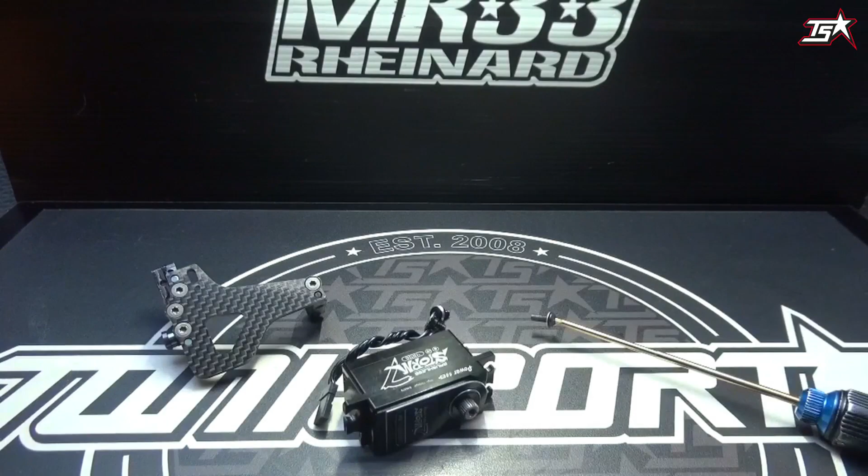Okay, let's start with the servo installation. First of all, I want to point out that these advices and tips are the same for almost every low-profile servo on the market, so it doesn't matter which servo you want to install in your touring car. Just take care and make it as precise as possible.

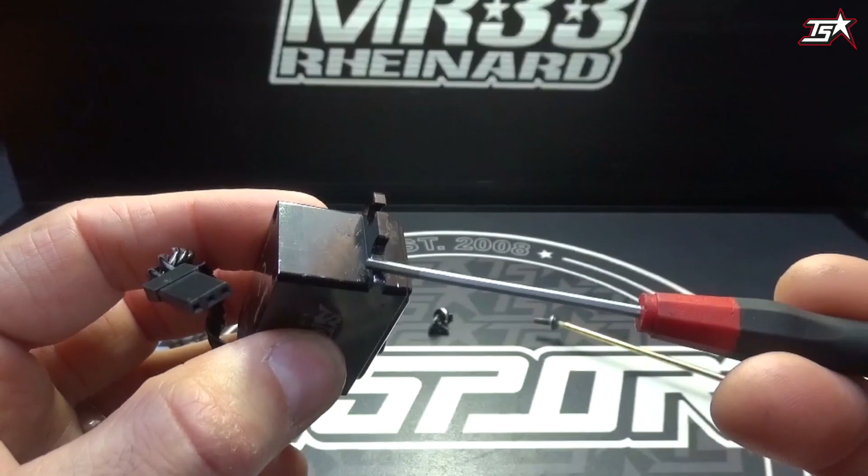First of all, I want to show you that I dremeled away this section here on the servo, the fourth mounting hole, because in this area the belt of my touring car is passing the servo, and in a lot of touring cars it's the same nowadays. You have to cut that left lower mounting hole. It doesn't matter if it's a plastic or an aluminum case on your servo. If you have to cut it, just make sure you cut it properly and allow your belt enough space to pass the servo without scratching or rubbing on the servo or the servo mount.

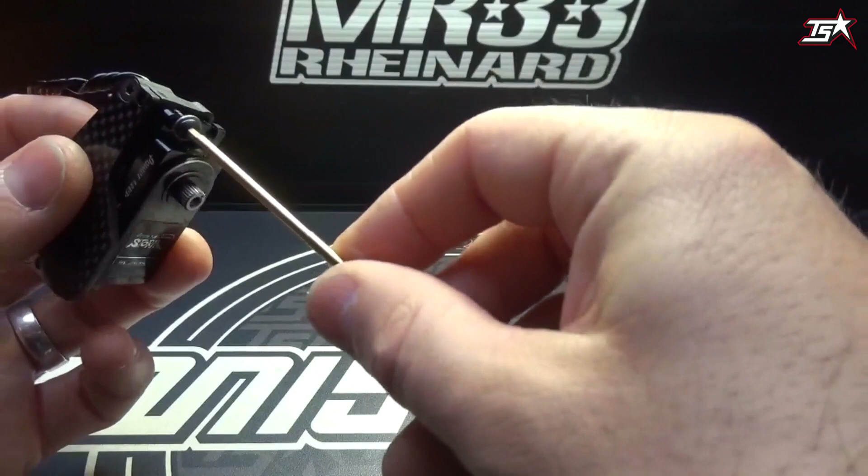The next step is to mount the servo in a proper way to your servo mount. These servo mounts are pretty much equal to this one here, and we now have the option to use 3 holes for the mounting. Normally you can use a standard button head screw and a washer to mount your servo, and if you do it like this, you can mount it properly. But I hope you can see it now.

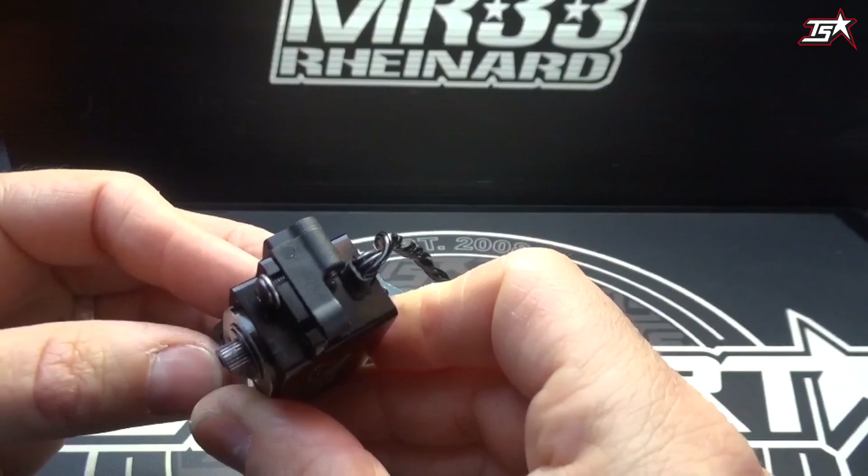When you only use a screw and a washer, it might happen that during a crash your servo can still shift, because the servo mounting holes have a bigger diameter than the screw shaft. This happens from time to time, and it's possible that your car will not drive perfectly straight anymore after you hit a barrier. So if you want to prevent this, you can use better servo mounting screws. They are available from different manufacturers on the market.

For example, I can show you these one-piece servo mounting screws here from One Up Racing, made from aluminum. But screws like that are available from other manufacturers as well. The benefit is that you have an all-in-one solution: the screw, the washer, and this piece of aluminum, which will fit exactly into your servo like this, without allowing the servo to move after you have mounted it on your servo mount in the car. So this is what I recommend to use.

Spend some extra bucks for good servo mounting screws, because after you have mounted your servo to your servo mount, you can be 100% sure that your servo is absolutely straight and mounted symmetrically onto your servo mount. You have to take care that the gap between the servo and the servo mounting plate, left and right, is the same, so you can be sure your servo is straight in the car and not in the wrong mounting position, because that will give you a worse steering feel and your car will not drive straight.

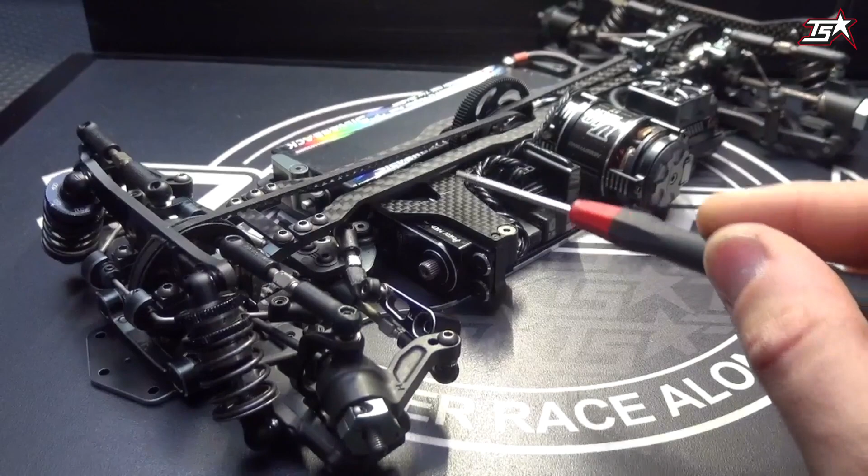Okay guys, the servo is mounted into the car in a correct position, because we used these high quality servo mounting screws. And now it's time to get your servo horn mounted here onto the servo.

Always make sure that you use the correct length of the steering link and this steering connection link according to the manual of your manufacturer when you build a car for the first time, or especially when you want to rebuild it and set everything to zero. It is super important that the left and right steering linkage are the same length. This can maybe have a difference of 0.1, 0.2 or 0.3 millimeters, which is not super critical, but a bigger difference in the steering link left and right will make your car not feel the same in left or right turn corners.

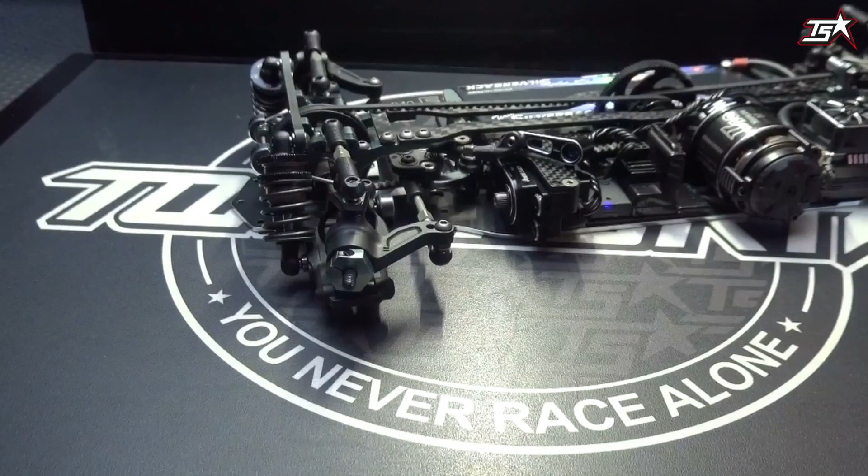Now you have to make sure that your steering servo is in the zero neutral position trimming wise, so you have to switch on the car once, then use your transmitter and set the steering trim to the zero position, which I will demonstrate now for you. Now we are in the zero position, which means your servo here is absolutely centered.

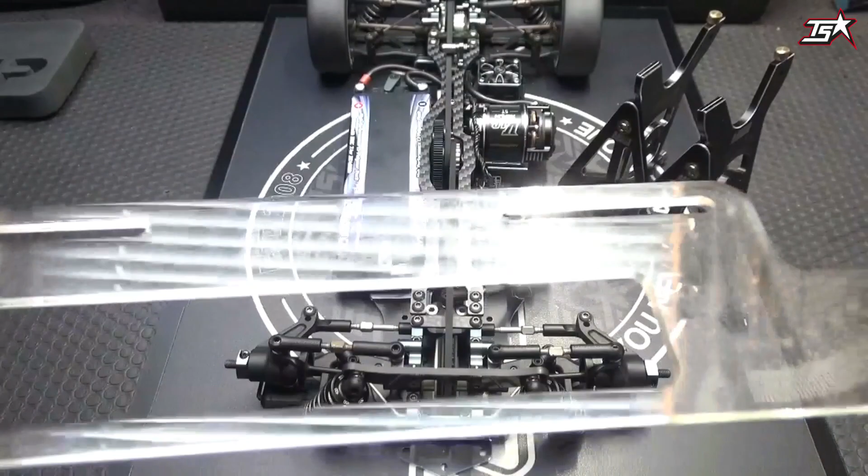Okay, now we are getting closer to the final steps of the steering adjustment, where we will need the setup system and the plexiglass plate to adjust our steering angle and the toe out.

But before we do that, I want to give you one more piece of information concerning the servo arm and the steering link. As I told you before, I recommend that you build these parts, the steering link and linkage, according to the manual, because then you will have a straight steering setup. The reason is that almost all manufacturers construct their cars to achieve a 90 degree angle between the servo horn and the steering link.

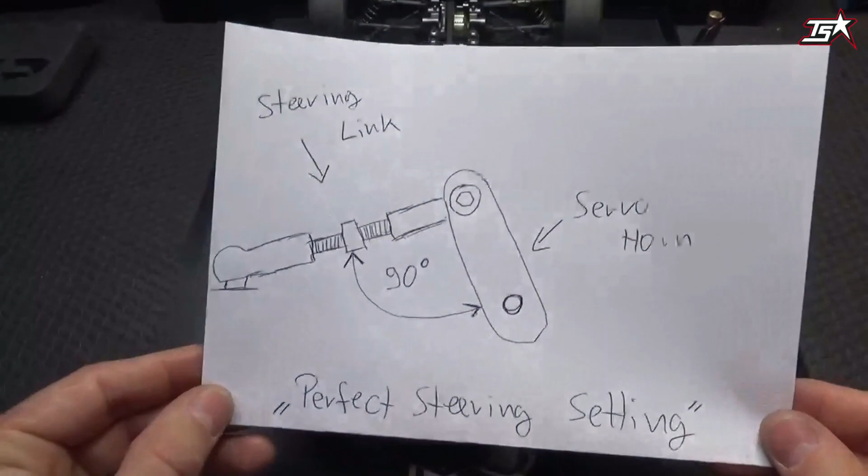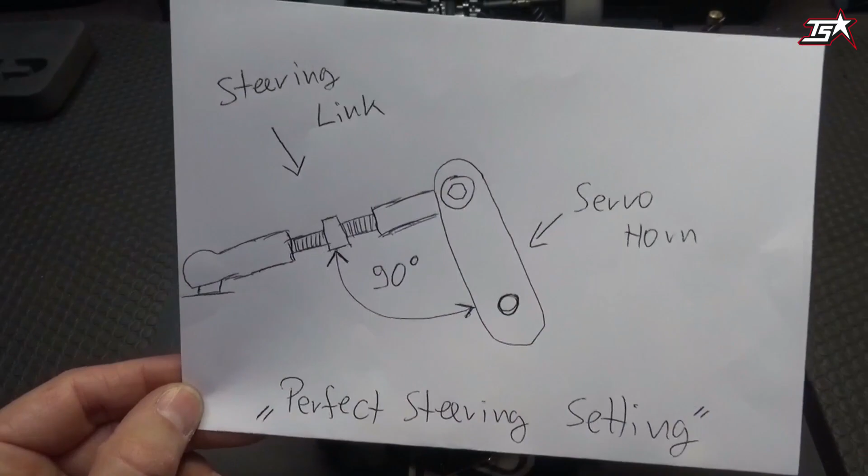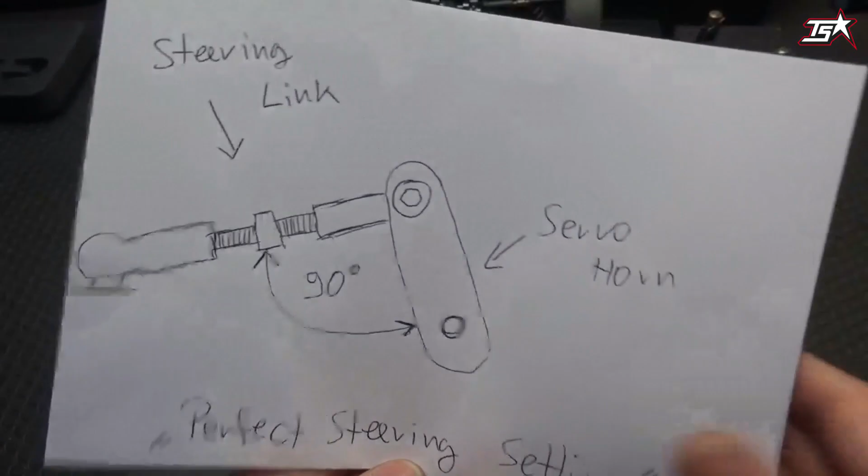For better understanding, I made this small drawing here. It is good to have a 90 degree angle between the servo horn and the steering link, because when we have this, the steering will feel the same left to right. We start the steering mechanically from a zero position, where neither side is more angled than the other when you steer left or right. So this is why all manufacturers have some different measurements in the linkage lengths, but in the end the result should be the same for all of these: to get this magical 90 degree angle between servo horn and steering link.

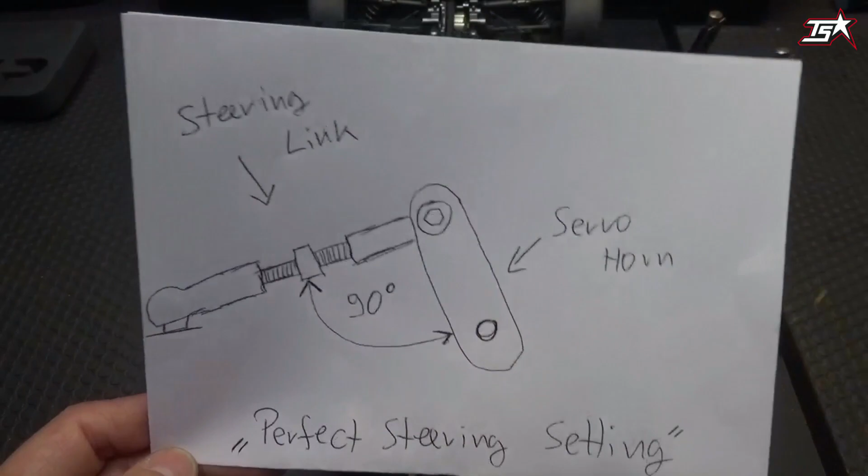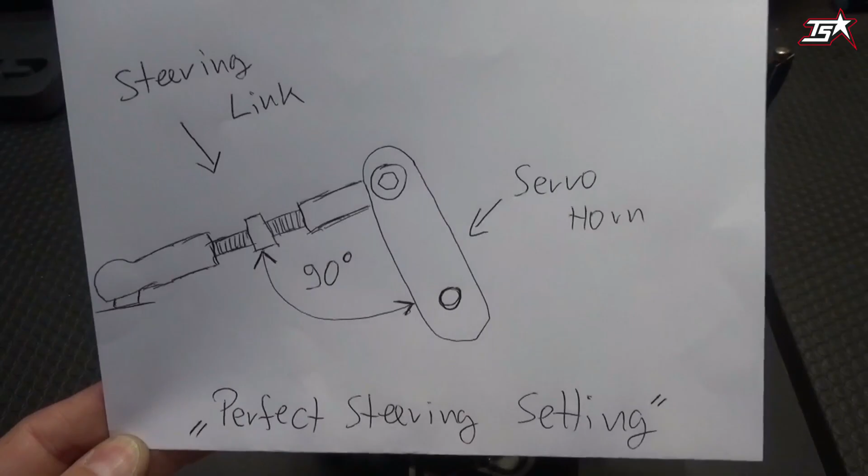If you cannot achieve that in a perfect way, maybe if you only land at 89 or 91 degrees, you will not feel that. But when there is a huge difference in the angle, you will have a car which drives left and right completely different, and this is what we don't like to have on the track. For fast lap times, you have to create a car which is absolutely amazing to drive and which always feels good in the corners, not good on the left side and bad on the right. So that's the reason why.

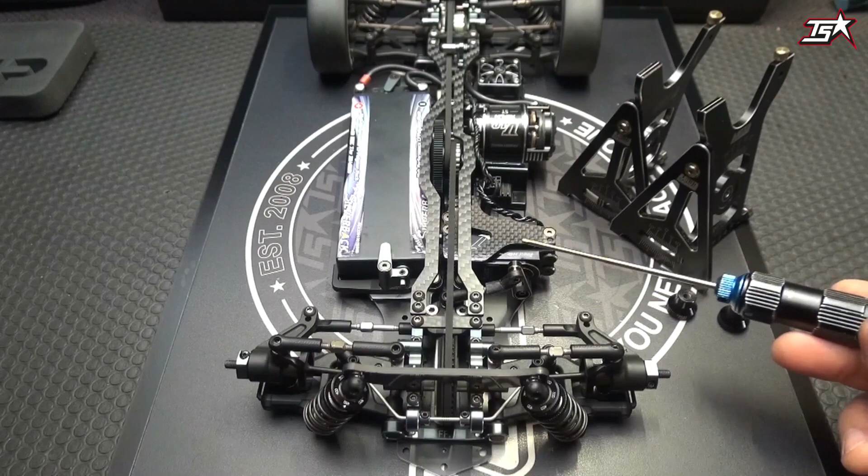When you install your servo horn onto the servo with your trim in the zero position, it can sometimes happen, depending on different servos on the market and their different gears and internals, that not every servo has exactly the same zero position. Sometimes when you install the servo horn, your steering in total will not be straight and may be a little off to one side or the other. In this case, when you are sure that your links are equal and everything else is good, you can use the sub-trim function of your radio to adjust a new zero trim point. With this sub-trim you can easily set a new defined neutral position of your servo, and then you can start adjusting everything perfectly left and right.

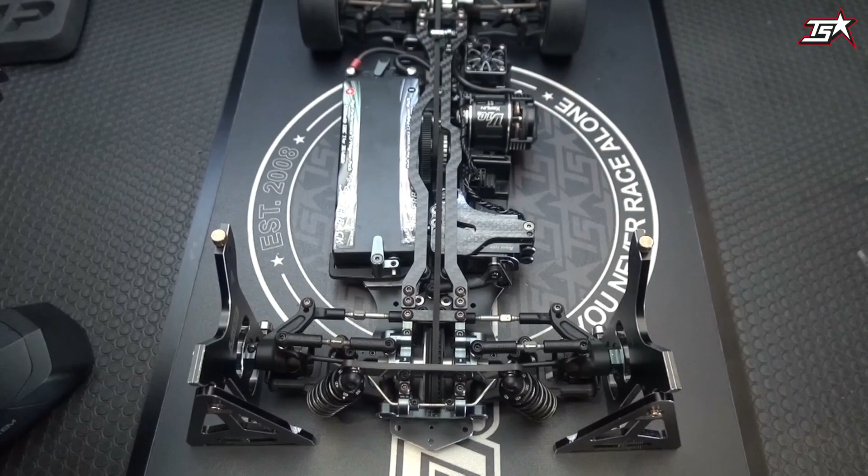Okay, now we are ready to adjust the final things on the car, and in these steps it is important to set the correct toe out first. So you need your measurement plate for your setup system, and then you have to switch on the car. I will not do it now to prevent the loud cooling fan from running.

With your car switched on, which means that your servo will hold the neutral position, you can adjust the left and right side of your toe. Generally it is important to say that on a touring car, or almost every RC racing car, we never run toe in on the front, because this will make the car almost impossible to drive straight.

Also, a toe of 0 is normally not used. We mostly use toe out, which means the wheels point a little outward in the direction of driving. Normally we use 1 degree toe out per side, maybe 1.5 or 2 degrees per side when racing on a super high bite track and you want to smoothen out your car a little and take away the aggressiveness. So that's important to know, I think.

Once you have adjusted your toe out left and right to the same value with this little tool, once again check the measurements, the lengths of your steering links left and right, that they are almost the same or very close to each other. Today's cars are all produced and machined in such a precise way that you normally cannot get big differences in these steering linkage lengths, because if you find out you have to use completely different measurements, then something else must be wrong.

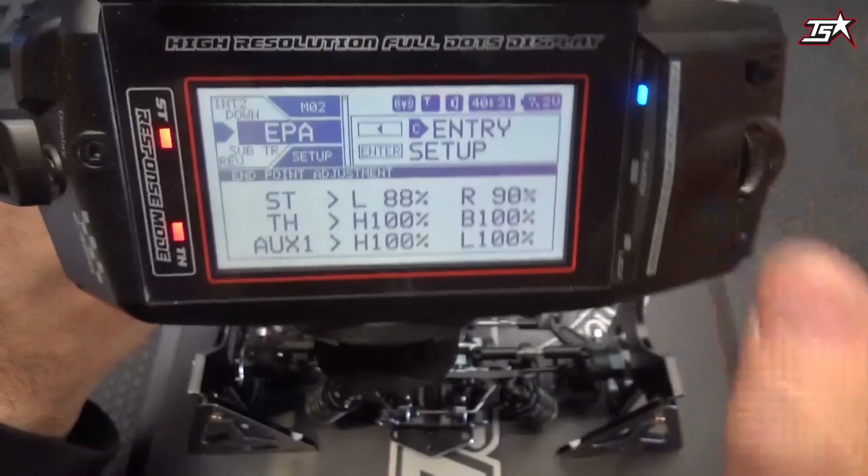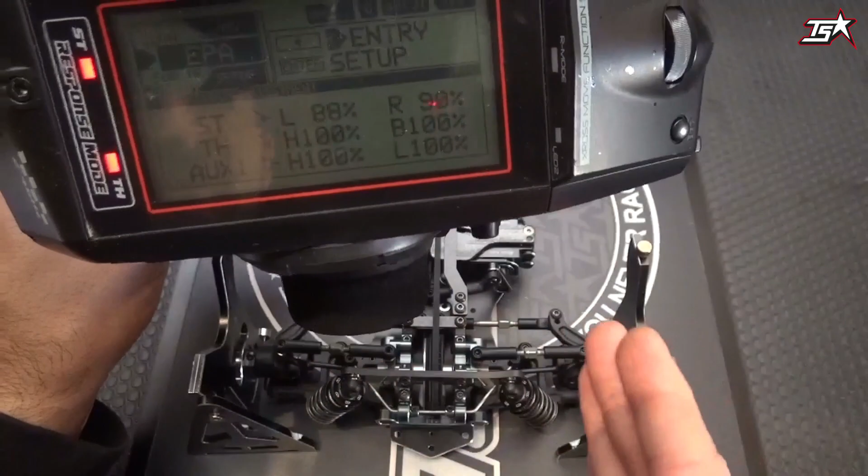When you want to adjust your left and right travel, use your transmitter. In the first moment I would always set the dual rate to 100, meaning your steering left and right will be 100%. Afterwards you can go into the setup which has the name EPA, the endpoint adjustment, where you can adjust the travel of your steering to the left and to the right independently from each other.

So you can adjust, as you see here, 88% to the left and 90% to the right. With these values, in this example, I achieved a maximum steering of 27 degrees.

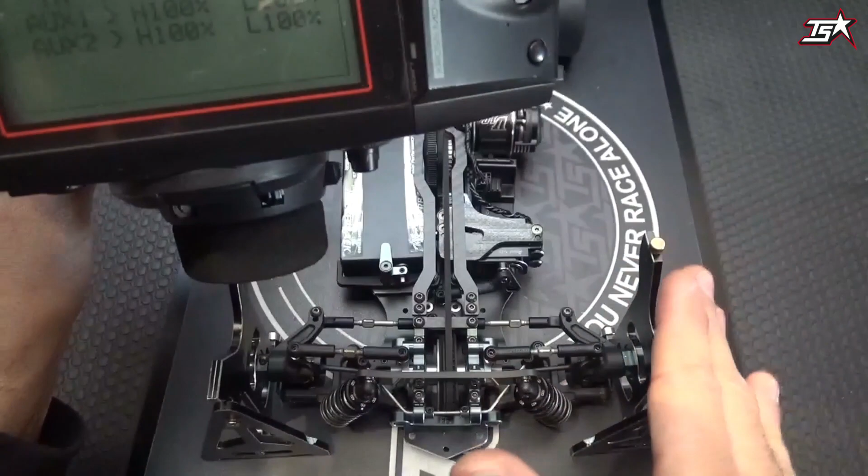From then on, when you have adjusted your travel left and right to the same endpoints of 27 on the plate, you can go back in the menu and go a little bit down with the dual rate to maybe 95% or 94%, and then check that your steering travel goes down as well. When you only want to run for example 23 degrees on a high bite track, you go low with the dual rate until you reach 23 degrees.

When you're on the driver's stand driving and you think, hey, I need a little bit more steering, that was too little, then you can go upwards again on the dual rate, and then you have more steering available.

It is important to know, and very helpful to know how you set it when you are driving or practicing, because sometimes 2% more or less steering will have a big impact on your car on the racetrack, and can make the difference from a car that is difficult to drive to one that is easier to drive or even faster, because you can cut the corners a little bit tighter.

I hope that this was helpful for you. Generally, when you adjust your steering setup, take your time when installing the servo. Make sure it's mounted properly and straight. Take your time when installing your servo horn. Use the sub trim if necessary to find the perfect neutral position on your servo to install the servo horn. Check that your steering linkages are the same length. Then when you install your setup system, check that your steering arms will never try to bend your C-hubs when you are at full steering lock, because then you have too big a steering angle.